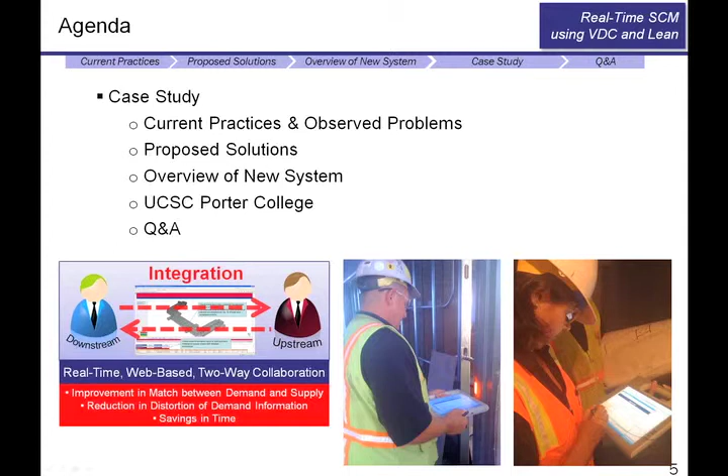Today, before I talk about the new system and case study, I'd like to share our observations on our current practice to identify which problems can be resolved by using the new system. So our first case is that our communication in the construction supply chain management is fragmented and push-driven.

One door-frame hardware project manager mentioned that closer communication between suppliers, field teams, and door-frame hardware project management team is the best prevention of future problems with supply chain effectiveness. Yes, this is very clear.

However, when we observed our current practice in the supply chain management in the field, there was no effective communication tool, and there was no direct communication tool between suppliers and field crews, and between field crews and project management team. Also, typically, project managers talk to suppliers through email, fax, or phone call.

And another thing to note is that the communication is even push-driven from upstream to downstream, along with the material flow. This fragmented and push-driven communication in the supply chain management in the construction industry results in higher possibility of misalignment between demand and supply, because suppliers' control on production and delivery is not based on updated weekly, daily work plans from the field, which we believe best reflects current progress of installation.

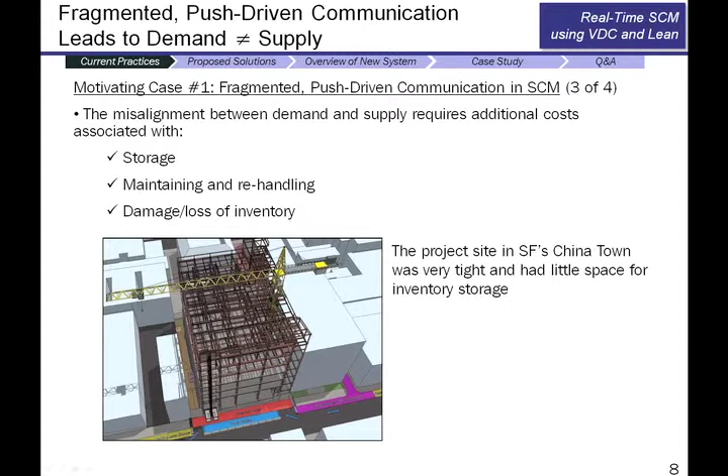So is there any proposed solution? Definitely, we have to have a better communication tool between supply chain players. So we propose to utilize a web-based Last Planner System, which is the registered tool by LCI, to enable two-way, web-based, and centralized communication. And we also want to use the pull mechanism concept to have the field crews report their demand directly to upstream, which is suppliers.

And real-time data capturing tools such as RFID tags, barcode labels, tablet PCs, and mobile phones can be utilized for instant sharing of information about progress of a supply chain.

Second observation is supply chain management has very low reliability. Let me give you one example. Field foreman is supposed to measure quantity complete on a daily basis or on a weekly basis. And he is also supposed to mark up on 2D plans with color pens to indicate which activities have been completed. So he typically measures quantity complete using a measuring tape or even visual inspection.

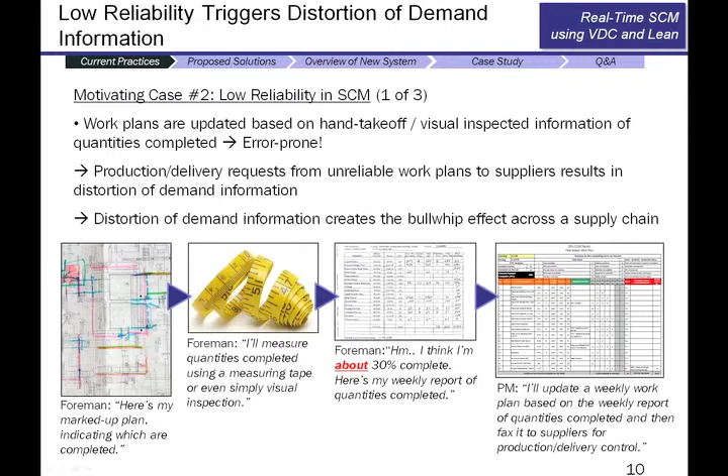Then he creates a quantity complete report to say, I'm about 30% complete, for example. Then he sends the report to a project manager so that the project manager updates his Excel spreadsheet or even bar chart for production and delivery control. However, this unreliable data captured in the field using a measuring tape and/or visual inspection potentially creates distortion of demand information, which would create misalignment between demand and supply.

Another similar thing is this reporting practice is manual-based and report-based. So there is a difficulty to share information among supply chain players. This difficulty increases latency of information sharing and decision making, leading to distortion of demand information.

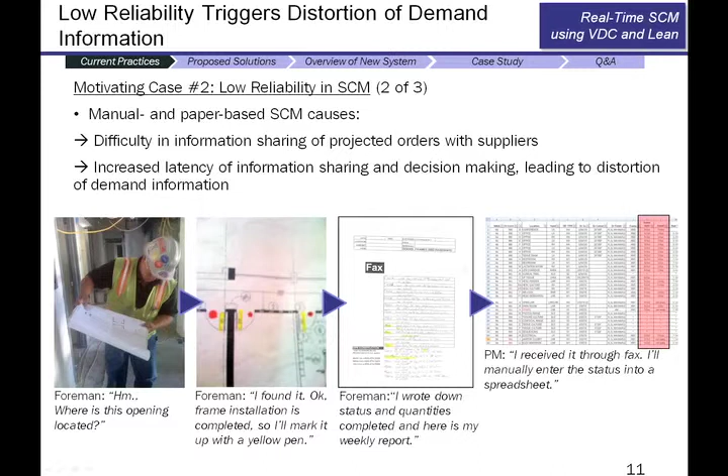So we believe that 3D models, real-time tools, and the Last Planner System can resolve this unreliability issue. With the 3D models, we can do model-based quantity takeoff for accurate reporting of quantity complete. And real-time data capturing tools can assist the 3D modeling

quantity takeoff process. And the Last Planner System can include very detailed description about resource, promise, commitment, and failure reasons, which can be used for better understanding among supply chain players about what happened in the field.

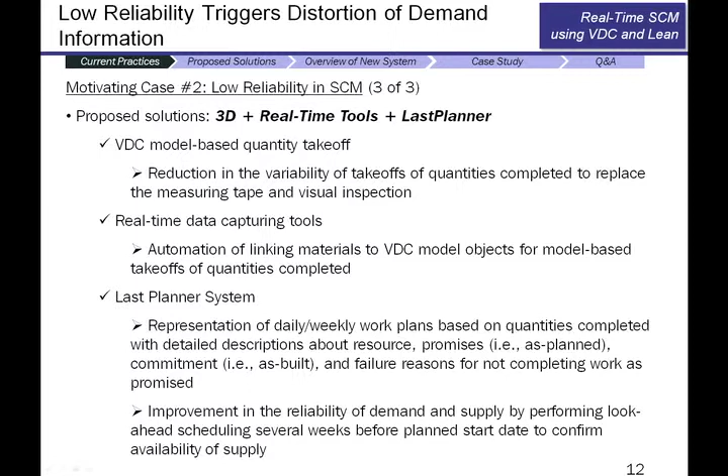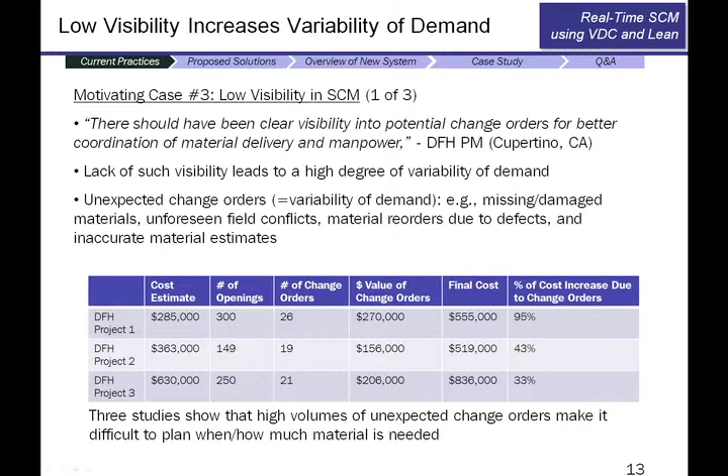Typically, about 2% of door-frame hardware job cost is related to unnecessary change orders. Unnecessary change order means I received the material, but I can't find it, so I'm going to simply just reorder it. One door-frame hardware project in Cupertino, California, spent about $6,000 to reorder the missing materials, and spent another $5,000 to bring the installers to site for additional days for installation.

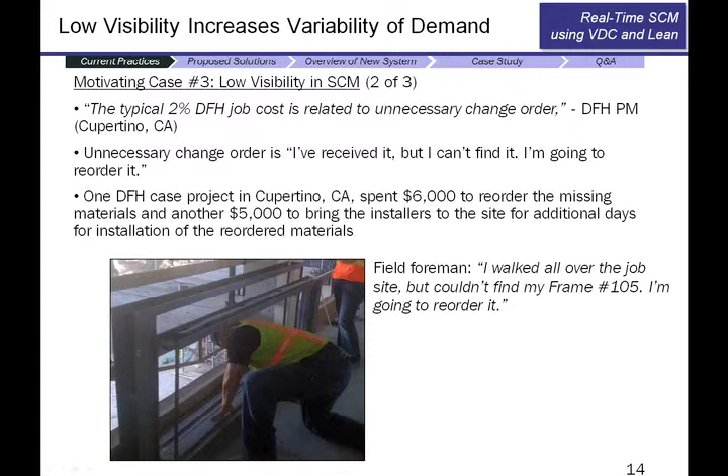So we propose to use 3D visualization for supply chain management. This 3D visualization can help us monitor unexpected field conditions and increase clarity in communication and reduction in change orders, RFIs, and decision latency.

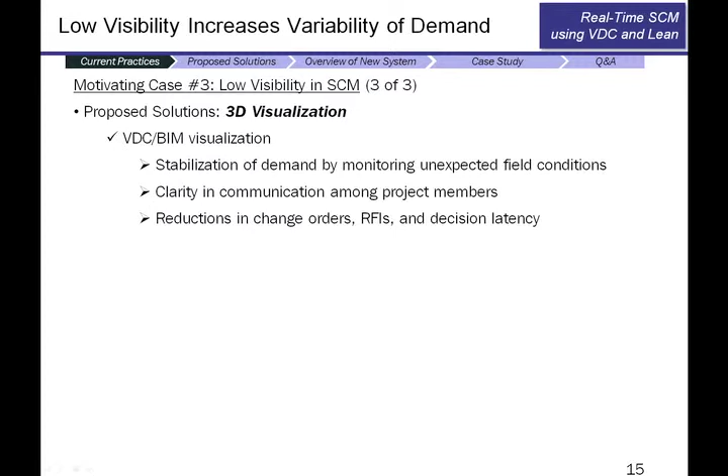Based on the three observations in the field, we believe that there is a need to develop a methodology and system to improve communication, reliability, and visibility by integrating VDC, BIM tools, lean concept, and real-time data capturing tools to improve the match between demand and supply, to have less distortion of demand information, and to have huge time savings.

With this integration, we aim to achieve three major goals in the construction supply chain management system. First one is better alignment between demand and supply to lower inventory and work in process on site with better production and delivery control. Second one is less distortion of demand information to lower latency of the decision-making process and unnecessary change orders. And last one is time savings in recording, documenting, communicating, and reporting in construction supply chain management.

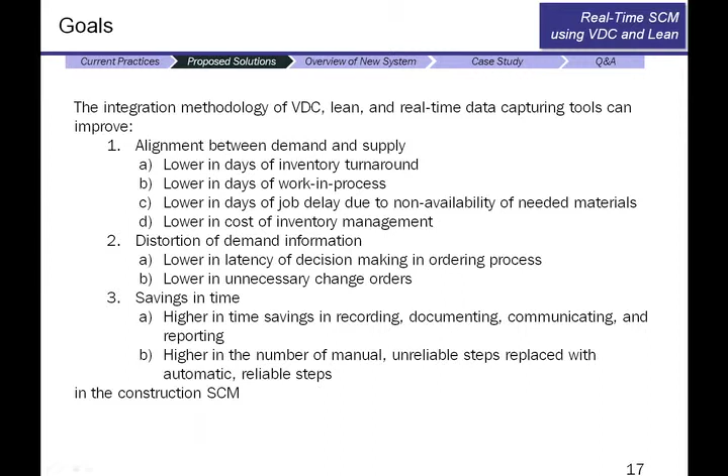So here's an overview of our new system. On each phase of a supply chain, such as manufacture, ship, receive, install, punch list, QA/QC, handover, commission, we scan a barcode or RFID tag on each material. This scanned information is transmitted to our VDC BIM servers to create color-coded visualization on a project website.

The time log data from the RFID tag or barcode label and quantity complete data from the 3D models will be combined and inserted into our ERP system to create reports such as real-time status reports, color-coded 4D visualization reports, and updated daily or weekly work plans in the Last Planner System.

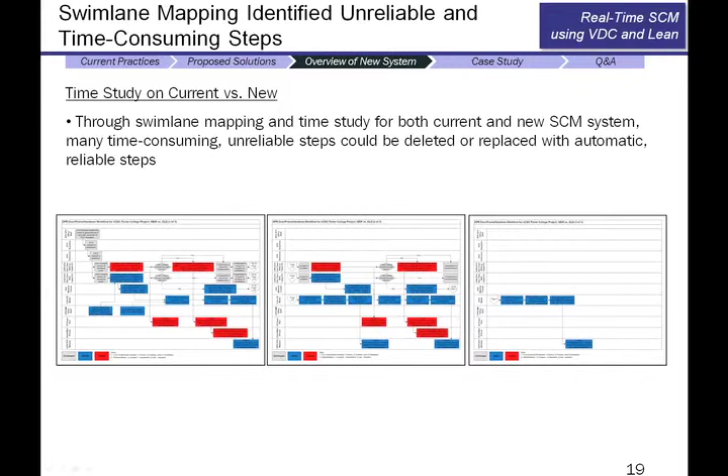To make a fair comparison between the current system and our proposed new system, we mapped out each step of supply chain management using both systems, and then we did some time study. Through this swimlane mapping, we identified which steps could be replaced with automatic and reliable steps. For example, with the current practice, every time materials are received or installed on site, the field foreman must manually review plans, update status, and then issue a paper report, which takes about 120 seconds per material.

However, with this new integration system, the field foreman can use barcode scanning to instantly access material information on the tablet page and then update status by one click. The output is automatically color-coded and reported to project managers and suppliers, which takes about half the time.

So we decided to use this new integration system for one pilot project in Santa Cruz, California, and here's the case study. The project was UC Santa Cruz Porter College B building, 6-story and 100,000 square feet. The materials tracked were about 200 doors, about 200 frames, and about 2,000 hardware. This is the interface of the tablet page where you can check time logs of each material for manufacturing, receiving, installation, and QA/QC complete.

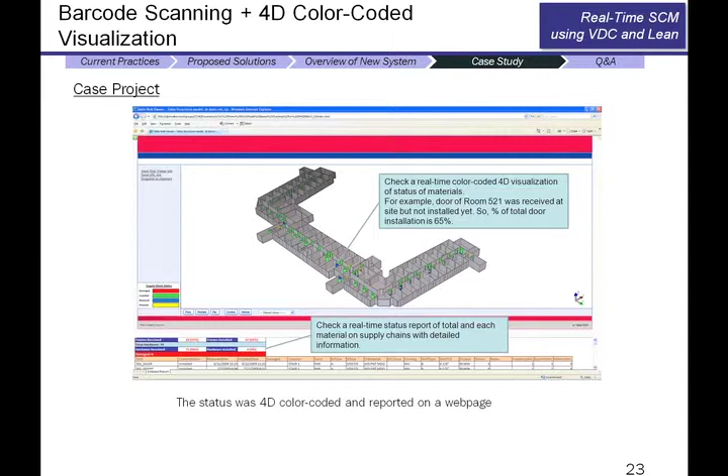Then the time log information from the barcode and quantity information from the 3D models will be transmitted to our web-based last planner system to update daily, weekly, and look-ahead work plans for better control over production and delivery schedule, to increase better alignment between demand and supply. And this is the best tool to indicate our current status of the installation progress on the site. And this is the best tool to share information among the supply chain members.

So with this new integration system, we achieved about 70% time savings in recording, documenting, communicating, and reporting, which is about 28 hours saved. And another benefit from this integration system was better visibility. Typically, we say we think we are 75% complete. However, with this integration system, we can say we know we are exactly 75% complete, and which 75% is actually complete on the site.

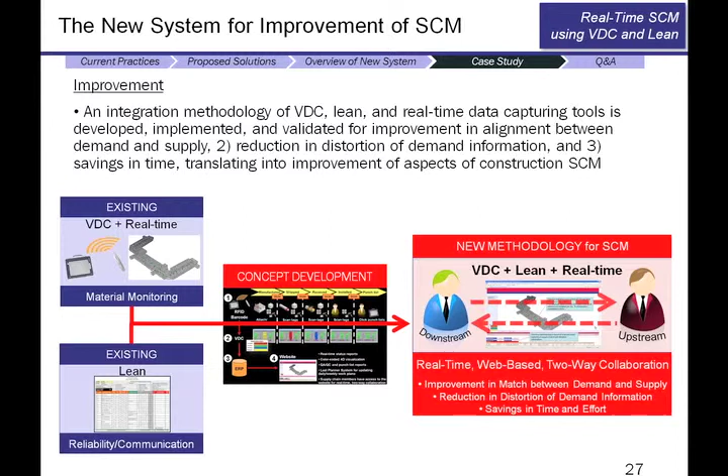Somebody would like to know, what are your sources for premium associated with change order work? I guess, so is that asking... I mean, that's typically negotiated under contract, but I'm not sure what the questioner means by premium associated with change order work. Okay, well, I will ask that person to either detail a little more what his question is or follow up with you after the webinar.

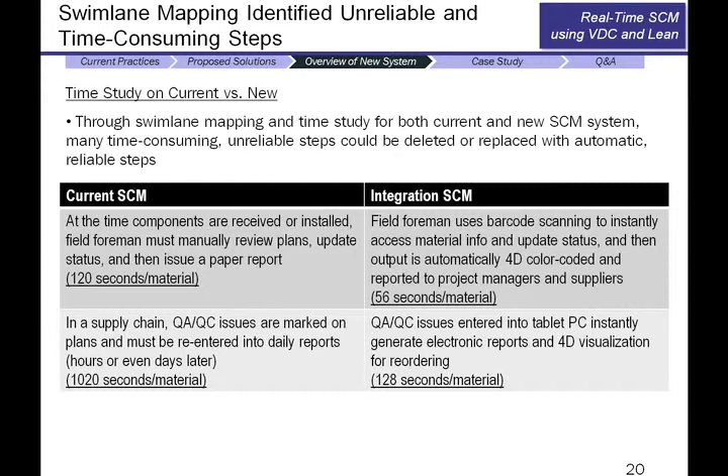Okay, someone wants to know if your web-based environment facilitates receipt of information from material vendors. So the way that web-based environment works is once our team, our job site foremen and others have interacted and done something with it, say we change the status on receipt on the job site. We do not have the field mobile devices with the material vendors. So none of the things that we show on the website get updated by anything the material vendor does after the first delivery. All of that is changed when somebody at DPR, be it our job foreman or somebody in our shop, does something with it.

And another thing I'd like to add is our project managers on site and in the office talk to our suppliers and vendors for production and delivery control through fax, phone call or email. However, with this website, we can simply give them a link, and then they can check the details report to check the status of the area and the flow, and then manage the schedule of production and control to minimize our inventory space in the field.

Great. Do you have any MEP subcontractors that have done anything similar with either duct or pipe systems? Yes, we do. A couple of mechanical and plumbing subcontractors have done that on a few of our projects. Okay, thank you. What must be the configuration of the grid to be able to read the RFID tags from all the materials? For instance, how many antennas do you use, distance between them, are they located on each floor? This individual wants a little more information on the setup. And also, are the RFIDs provided by each manufacturer of each element being tracked and scanned?